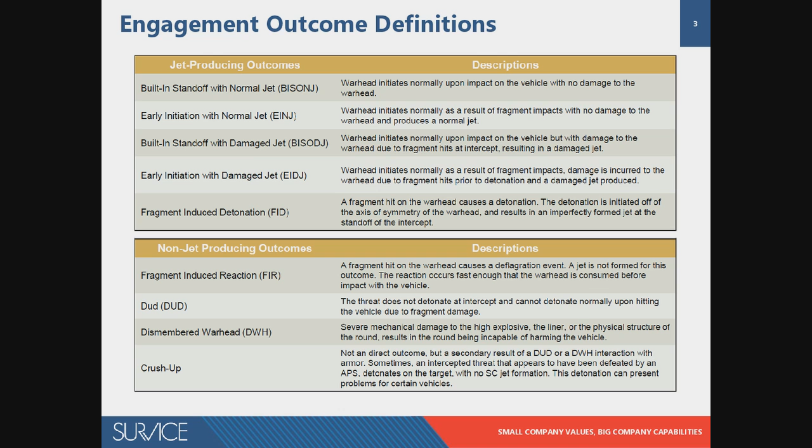But in doing our quantified approach, we decided, along with our customers, that if we at least look at the early initiated normal jet probabilities, or just assume that happened, that's kind of one of the worst case scenarios, apart from a built-in standoff normal jet. And so we managed to narrow down the area we're looking at, with the understanding that the other jet producing outcomes are not as bad if they do occur. And so that's the rationale for going deeper into the EINJ phenomenon and doing the analysis from that context.

So more background. SC3D. It's Survice Grown, again written by Pat Buckley, and it was originally written as a design tool for shape charges, where you could do shape charge analysis versus RHA or steel armor, and input the geometry of a shape charge to your heart's desire, to try to determine if you can have an effective shape charge. And then you can test it against armor and see if you have improvements in penetration.

And it was predominantly done for single shot target analysis, where you can load a 3D target and you can try out that shape charge against some sort of armored or not armored target to determine what the effects are of, say, increasing your armor against this shape charge, and to determine the trade-off between an armored target versus a shape charge that you're either designing, or a shape charge that's already a known quantity.

And so it can be used either in a lethality approach or a survivability approach. Right now, it's being extensively used by naval surface warfare for ship survivability, and Pat Buckley's helping them out on that. And more importantly, we're looking at the jet breakup. We also have in that code jet breakup associated with incoherent shape charge at standoff. And that's critical to understanding what happens to survivability as we evaluate the countermeasure or EINJ that's associated with countermeasure engagement of the shape charge.

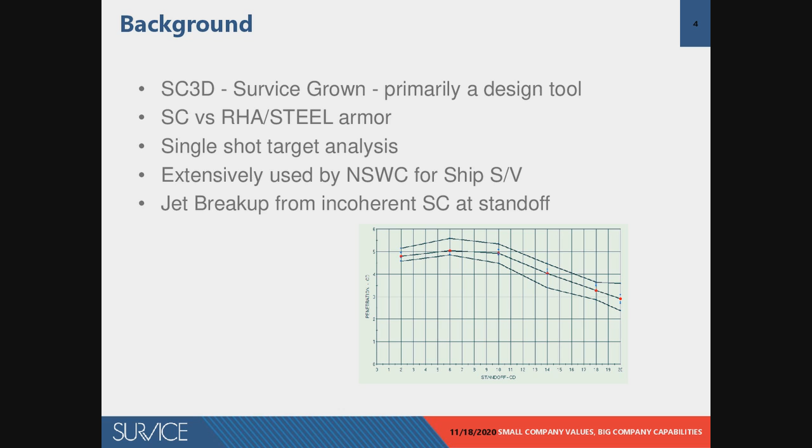So in terms of what we've been doing with Survice, we had internal research and development funds that added additional utilities to SC3D to look at this residual damage from shape charge early initiated normal jet. In particular, we're able to now get penetration through composite armor. And with that, what I was going to talk about with you was to do an exercise in getting the RHA equivalent for some sort of composite armor.

And once you have the RHA equivalent for composite armor, then you should be able to use that to do traditional vulnerability assessments for tools like MUVES AJEM. And we have our own tool just like that called Turbo PK. Right now those tools don't necessarily have that capability, but they're working towards it. And so this gets you a quick way to get through it.

We also have a capability in SC3D where we can get a probability of kill given a countermeasure intercept of a shape charge. And this is with a single burst, called a single burst point. It's actually really an EINJ event that we run stochastically, and it's not like a single point thing. It's a Monte Carlo run, so we can get a probability of kill with that particular intercept. And we also have this new capability of getting a PK given a launch.

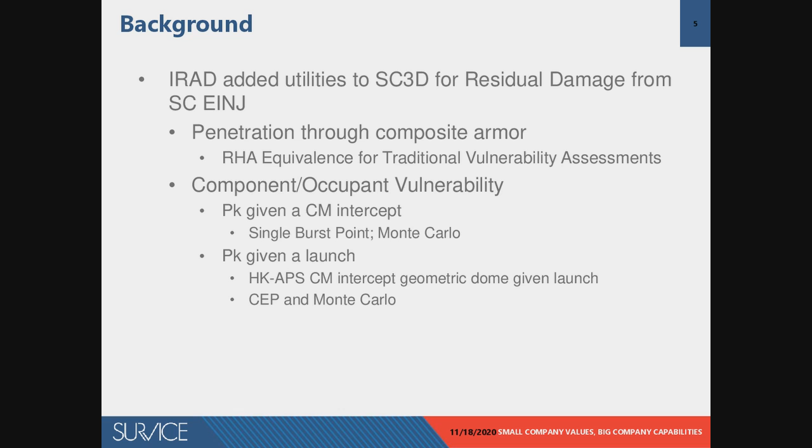So going into the first kind of analysis that we can do, and this is an example of getting an RHA equivalence of composite armor. And this is a sample exercise. So this is harkening back to SC3D's capability to look at shape charge designs where you can input whatever shape charge parameter, geometry, physical properties where things occur within the shape charge, and then determine what happens to the penetration depth into a semi-infinite RHA or RHA slab versus standoff.

So this portion of it at least gives you kind of your sanity check where you are indeed modeling the shape charge correctly, if you are modeling indeed some sort of real shape charge, and gives you a reality check of what you're seeing. So this is kind of the original part of it. But in this analysis, I've input a hypothetical shape charge of the variety that we normally encounter out there in engagements. And this is where we start off in this analysis of getting the RHA equivalence against composite armor.

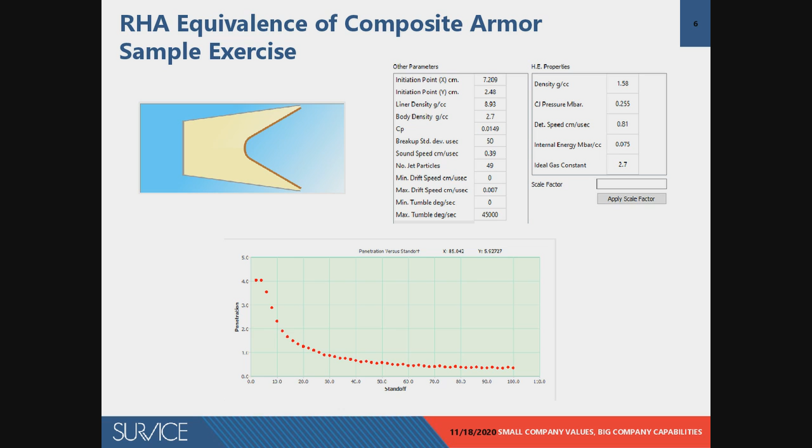So once the shape charge is input, then we can look at some sort of armor recipe. In this particular case, it's just a hypothetical armor recipe with ceramic, aluminum, RHA, and fabric in there, layered in some random fashion and some random thickness. Not optimized for anything. This is just a sample. But what we're really interested in is where the probability of penetration goes to 0 versus standoff. So we want to understand at what standoff the probability of penetration drops to nothing, and use that information.

So the first thing we need to understand is if it's a composite armor that's newfangled and we don't know anything about it, we need to input what's the closest standoff and what's the farthest standoff that we do our analysis in. So that's input into this run, and we can also put in the number of times each standoff is evaluated in a Monte Carlo fashion. So each of the dots that we see in this chart is actually 100 Monte Carlo runs. So it averages out over 100 runs what the probability of penetration is.

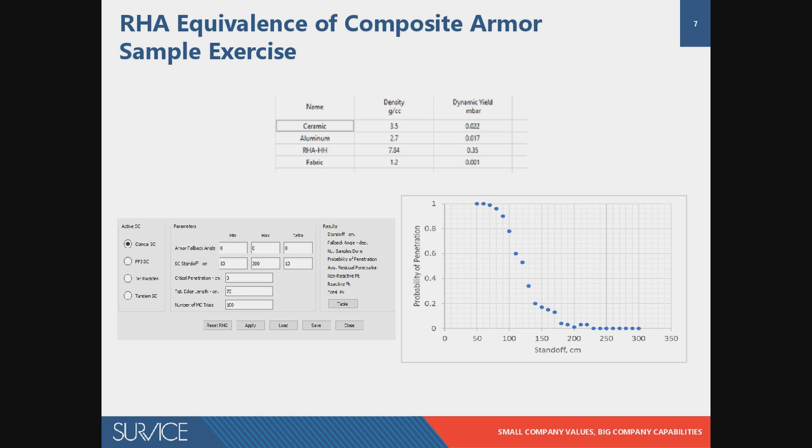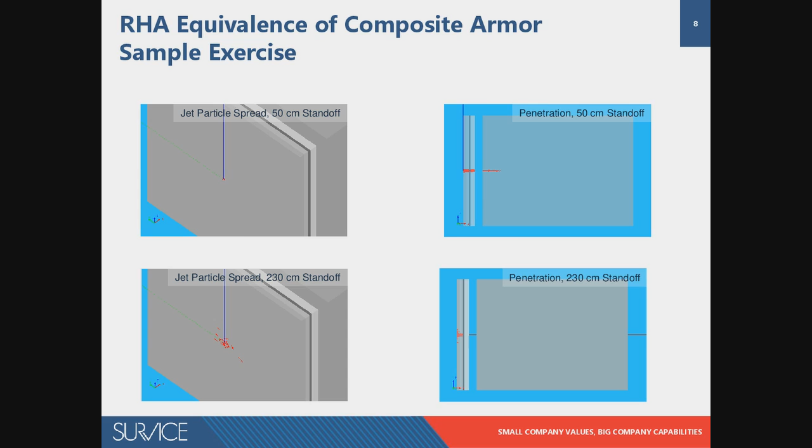In evaluating probabilities of penetration through that armor recipe. But now again, we have that nugget of information from this analysis of about 230 cm standoff. And so we take that piece, and then what we want to do is run the same analysis with just pure RHA, because what we're trying to do is find out the equivalent RHA thickness that produces the same performance as that armor recipe.

And so, in this particular slide, I've got it at about 2 cm for RHA. And what happened was I got lucky. I ran it between 50 cm standoff to 300 cm standoff, and it just so happens it more or less fell at about the same performance as that armor recipe that I just made the run for.

So it's not being shown here, but in this particular case, I just kind of haphazardly got lucky with this 2 cm illustration. So the bottom line is that hypothetical armor recipe that we just did the analysis on is equivalent to about 2 cm of RHA armor. And that's the information that we use in the traditional vulnerability assessments, and at that point we use that information to understand the survivability of the target vehicle and the components within. So that's getting the RHA equivalency done.

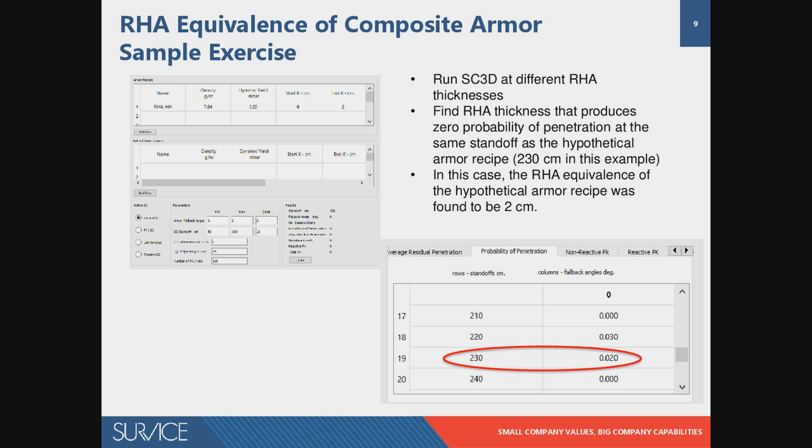Now let's move on to occupant vulnerability with a single countermeasure intercept. In this example, I use a sample target geometry. It's the BMP2, and in this particular scenario I've got the occupants set as the vulnerable components, and just to make things simpler, I don't have any fault trees in there, and I've set each of these components to be a kill at a jet impact of 0.1 centimeters per microsecond. And so that's our fall off on when that component is killed.

And this exact example here is just a single EINJ event of an 80 millimeter diameter threat. And we pretend that the intercept occurs at 5 meters from the vehicle. That's all input into the analysis. And jet breakup that's associated with an incoherent shaped charge is modeled as well. And then the Monte Carlo is set to 50.

So in this particular case, because I'm aiming for a particular vulnerable component, we get a kill with this Az/El and aim point for that particular component. But at the same time, visually, we have this understanding that you would have to be aiming for these. And so what would happen in a vulnerable area type of analysis is really its projected area for this standoff is what occurs as being vulnerable for these vulnerable components. So we have that kind of understanding.

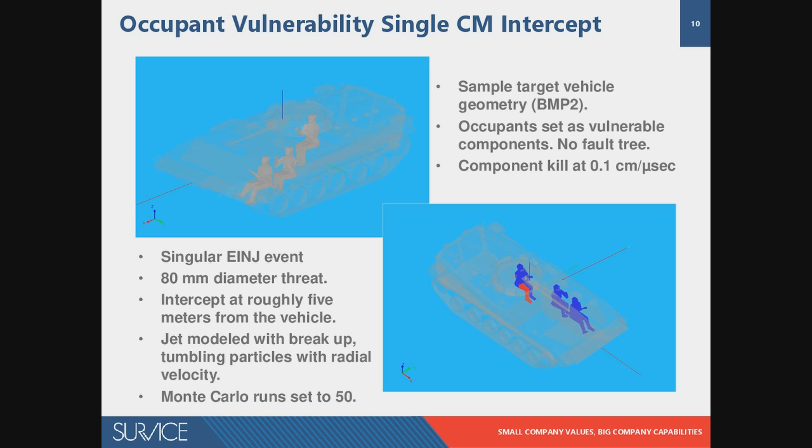But at the same time, since I'm aiming at the top of the vehicle where the armoring is low, we do get a component kill. If I had aimed at an Az/El that is going through some armoring, then our probability of kill for that component would probably not be at all or as high. So that's kind of a one-shot analysis of understanding occupant vulnerability with a single countermeasure intercept.

Now I'll move on to understanding probability of kill given a launch. Within the code itself, we use what's called a circle error probable. And we apply that to some sort of protection dome about the target. And this is where we assume that if there's an intersection of a threat coming through this dome, the dome is where the countermeasure would set off the shaped charge and initiate it as an early initiated normal jet. So given this launch,

that circle of error probability is essentially overlaid on this dome, and that CEP, or circle of error probability, is governed by this formula, and it's a classic Rayleigh distribution. The analyst has an opportunity to dictate what that CEP is in terms of just inputting a radius, but the guts of it is it uses this formulation. And for each one of those intercepts, a Monte Carlo is run.

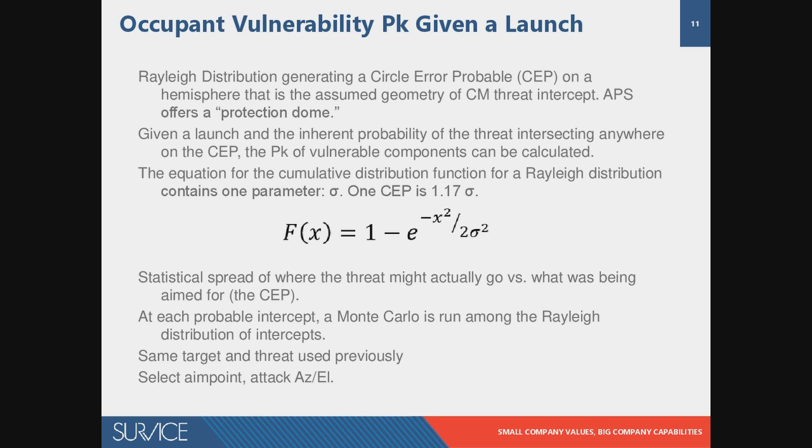event. And so in the slide that I'll be showing, we're using the same target, that BMP2, same threat, the 80 millimeter threat, and I've selected an aim point and an attack as an engagement parameter. And so here we have that one scenario where I've inputted at the top middle the Az/El and the aim point, and more importantly the CEP, the circle of error probable, and that's where, as an analyst, we have an understanding of, okay, well, if it's shoulder launched, then they're not typically very accurate at aiming and shooting, because sometimes they're getting shot at.

But if you're talking about an ATGM and you have a target reticle and you may be at a higher standoff, you have a better shot at making that CEP smaller, so you as an analyst would take all of that stuff into account. And within this analysis, there's the number of trajectories. How many trajectories within the CEP am I going to try out? And I've set it at 50, but we've only come up with a handful of actual intercepted trajectories that's associated

with that CEP. So because the CEP is kind of large, our actual intercepted trajectory count becomes small. Now I can play around with that and make it smaller, and then really have a concentration of interceptions of the countermeasure with the threat, so that we can evaluate that. But that really depends on where you think that CEP is going to be based on the threat that you're encountering. And for each one of those intercepts, I've got it set at 20 Monte Carlo runs,

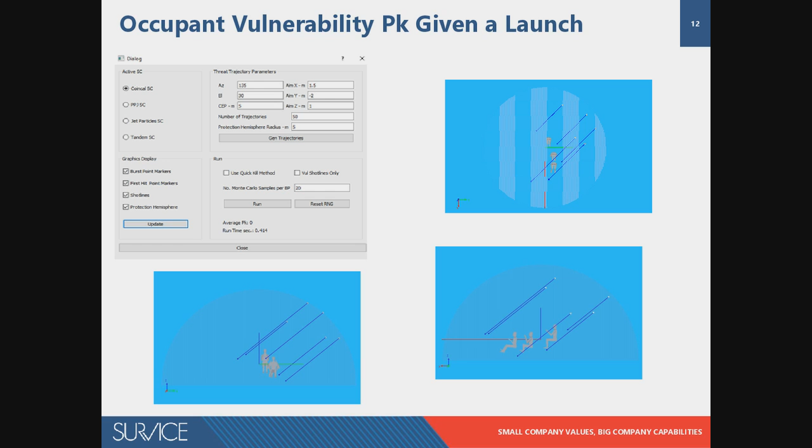Okay, so that's this third example of what we've done with SC3D, and heading off to concluding this talk. So we were able to get an RHA equivalent for armor recipes that include fabric and ceramics. We're able to do an occupant vulnerability analysis with a single burst or a single EINJ event to understand what happens for a single engagement event. And we were also able to get a probability of kill for a countermeasure engagement given a certain launch, understanding that there are things that need to be taken into account when a threat is launched at a vehicle.

So either way, we're able to get our arms around a much more quantitative understanding of the performance of a hard kill active protection system.